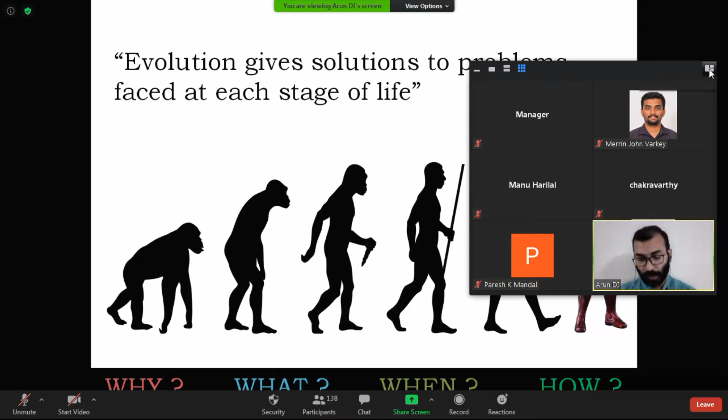Why to evolve? Because we wanted food, more food. What to evolve? We had to evolve based on the availability of tools and weaponry to hunt. When to evolve? When you are hungry, you are looking for food. How to evolve? It is the development of newer technologies. How do the newer technologies evolve? By means of newer materials.

So we have a problem. We identified a problem, and for attaining the solution, we have to go through a series of steps - with the support of evolution as well as intelligence, we are arriving at a solution. The ideas, thoughts, material, realization, and system are the step-by-step systematic approach towards a solution. Materials are highlighted in red because it is one of the major centers of attraction in this kind of approach.

We learn about materials. Hope you are familiar with the term space elevator. It's actually a concept of a transportation system planned to take men and material to space without a rocket or a launch vehicle. This concept works very similar to what I'll show you here.

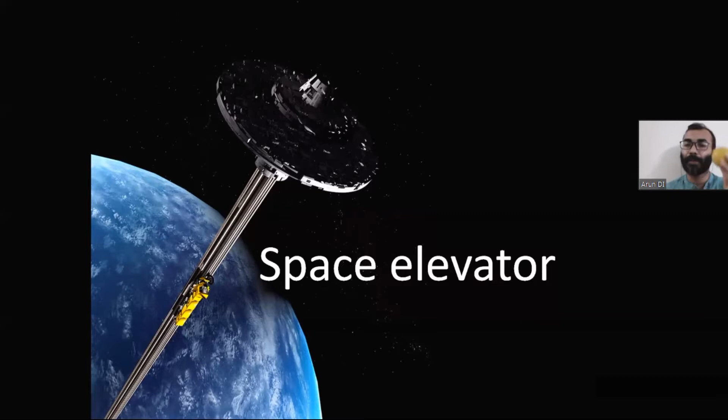This is a smiley ball, which we can use to represent Earth, and this is a counterweight which is attached to a thread. Now when we attach this to the surface of the Earth, it will rotate along with the Earth. This is how a space elevator is conceptualized - a counterweight will be rotating along with Earth and will be attached with a thread, and this thread should be entirely made of very strong material which can have transportation from the surface of the Earth to the counterweight. This is how a space elevator works.

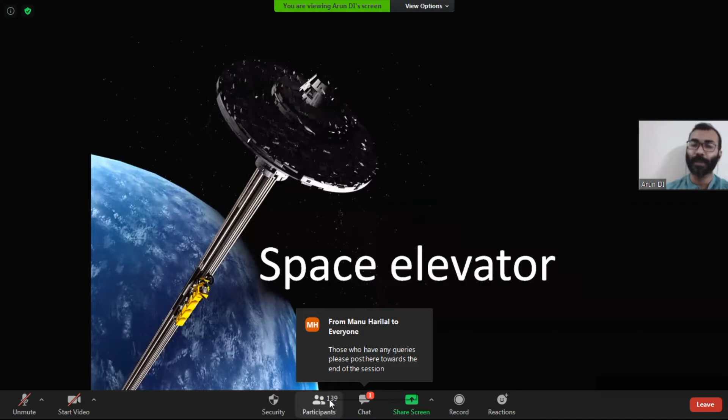This concept was proposed by Konstantin Tsiolkovsky in the early 20th century, but we were stuck in a place where we didn't have material to fabricate this kind of concept. So for that, many proposals have come, and out of that, we finally discovered that carbon nanotube, a carbon material, has very high strength - around 100 to 200 GPa strength, gigapascal strength - which can take the load of moving men and material from space in the space elevator. Elevator means lift only.

A current world order demands the development of science and technology, science and engineering, and opportunities using advanced materials as building blocks. You can see the background is a space platform, a scientific platform, which is planned in the orbit of our moon by NASA to study materials in outer space.

Which will lead us to many of the solutions and answers. Material science is an art, and a material scientist is an artist. It is basically the design and discovery of newer materials, one of the oldest forms of engineering and applied science, and it is analytical thinking from chemistry, physics, engineering to understand the phenomenological observations, a discipline hybridizing metallurgy, ceramics, solid state physics, and chemistry.

Many of the most severe problems in the scientific world are ending up in the question of having a better material. And any breakthrough in material science is likely to affect the future of technology significantly. This reminds me of a concept called the butterfly effect, where the flapping of the wing of a butterfly can cause a tornado somewhere else. So it is similar to our corona.

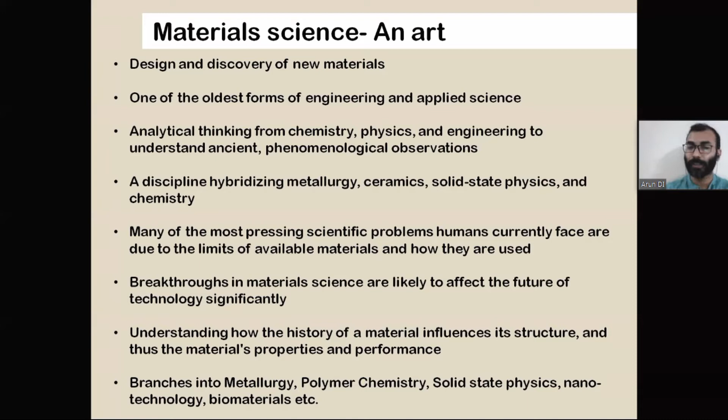Understanding the history of the material, its structure, its properties, and its performance comes under material science, and it branches into metallurgy, polymer chemistry, solid state physics, nanotechnology, biomaterials, etc.

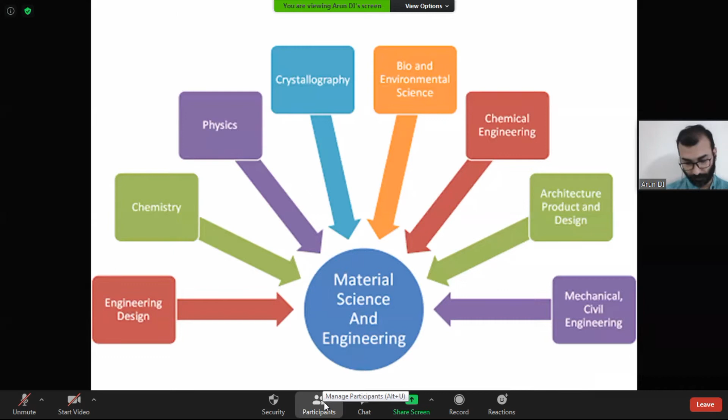So far, you have heard Dr. Arun, and this whole webinar series is about material science and engineering. So before getting into the actual theme of this particular webinar, you need to understand what material science is, which is going to focus only on metals and alloys.

So when you study the branch of metallurgy and material science, you would cover and understand the behavior of a variety of materials, including metals and alloys. So this is absolutely an interdisciplinary branch of engineering, which encompasses different other disciplines.

Starting from, if you need to understand the science behind those materials, you need to know the physics and chemistry of it. For example, steel: if I say steel is an alloy of iron and carbon, you need to know how much carbon should be added to iron so that it becomes steel, so that it has the requisite properties. So there comes your chemistry, and your physics is something which dictates the mechanical properties of the material.

So, suppose some load is exerted on the material, you need to understand how it is going to behave, whether it will have higher strength or lesser strength, or whether it will have very high hardness or very low hardness. So for all this understanding, you need to get into the actual science of these materials.

So this particular branch of engineering gives you complete insight into how material responds to external factors, and also helps you judiciously select the right material for certain applications. And in metallurgy engineering, you also study how metals are extracted from ores.

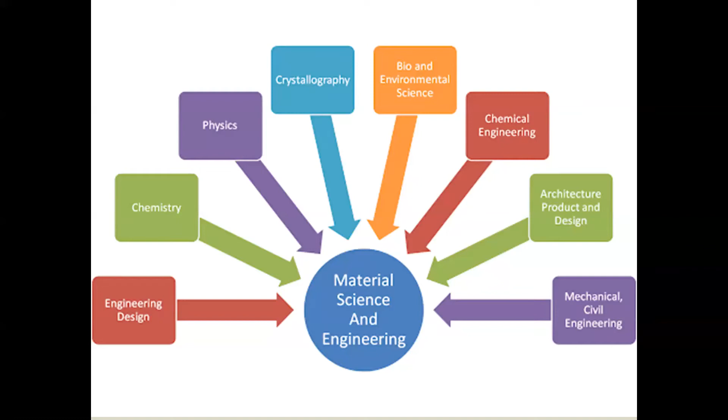Next slide. As mentioned earlier, materials are named, and the ages are named after the materials.

So the Paleolithic era can be traced to the Stone Age, and it has been termed as such. Next we had the Bronze Age, then subsequently the Iron Age, then the Steel Age, and then the Silicon Age. So when you look at history, it is all named based on materials, and this itself gives you an idea of how important materials have been for the revolutions that have happened so far.

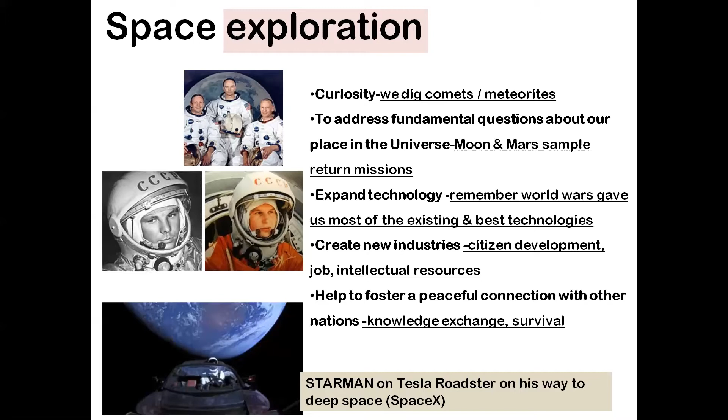Okay, so the materials which are used in space. Arun was mentioning about the space elevator, and every time we launch something to space, a satellite, it is going to be there at very high altitude, say at 36,000 kilometers altitude from the Earth's surface, or at an altitude of around 200 to 800 kilometers. So space is considered to be very harsh for any material to survive. It is not very benign, or comfortable, or convenient as it would be staying on the Earth's surface.

Suppose when you keep any steel outside for say 1 or 2 days on the Earth's surface, you see that immediately it is going to rust, particularly steel material used for construction. So in 2 or 3 days, you see that the steel turns slightly light brown in color, which means it has gotten rusted.

And similarly, when you're going to use materials in space, the corrosion, we call this rusting, is going to be more pronounced in space. And if you want to use any material which should not rust, you need to have knowledge of the variety of materials, then only you will be able to select the right material for space applications.

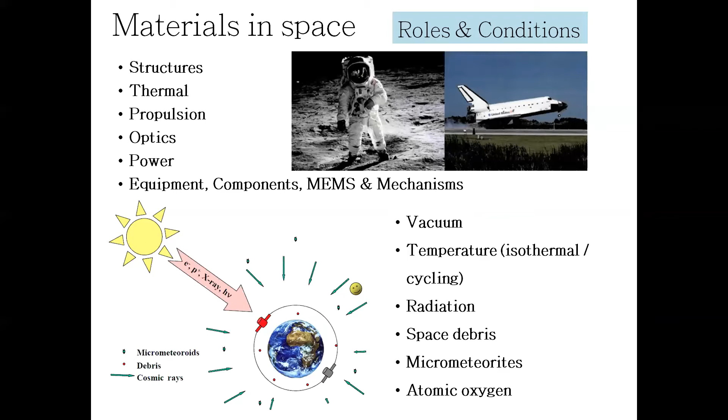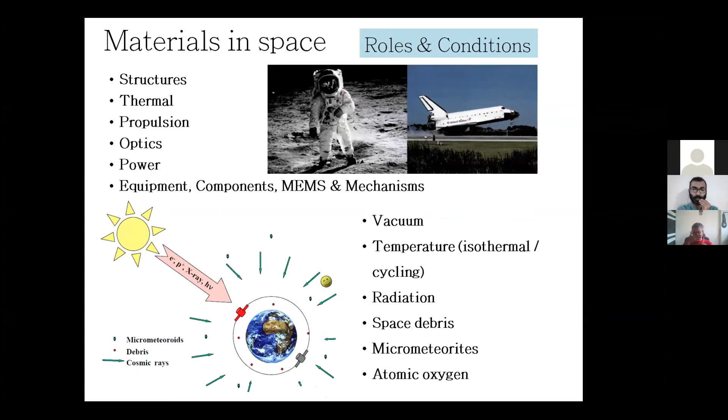Adding to what Dr. Chakravarti told, we have people staying in the International Space Station. So radiation protection is also a significant aspect while deciding the material which can survive high radiations, gamma radiations, X-rays and UV radiations from the sun and other stars and deep space should be resisted by the material so that our astronauts or scientists in space are safe against all these radiations. Thank you, Dr. Chakravarti.

Now, let us go to, we have seen material, what is material, and what properties are required. So what are the different types of material we will just look into? As Dr. Chakravarti mentioned, ceramics, metals, polymers and composites are different categories, a broad category of materials when we look into material science aspects.

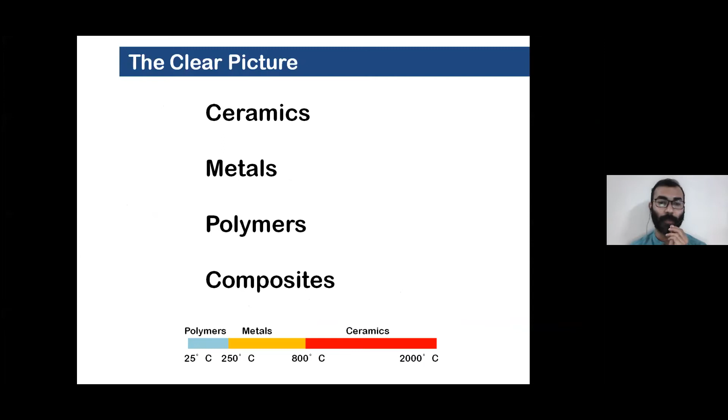Ceramics are for higher temperature, up to around 2000 to 2500 degrees Celsius, and metals will resist maximum up to 800 degrees Celsius. Polymers can resist up to 250 to 300 degrees Celsius. And composite materials are a combination of either of these materials, which can have properties of any of these materials, superior properties than any of these materials. We will see in detail all the materials in the subsequent slides.

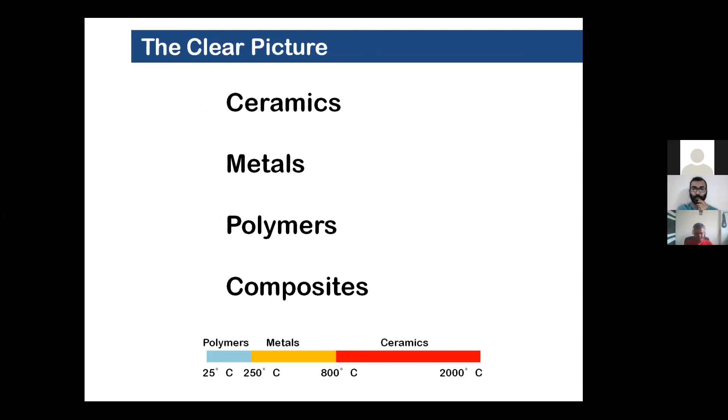Out of materials used in space applications, mostly we go for alloys because they have superior properties than their metal counterparts. So aluminum alloys, titanium alloys, inconel alloys for oxygen storage. Then we go for composite materials - glass epoxy composite, carbon epoxy and aramid epoxy composite, which we will see in the subsequent slides.

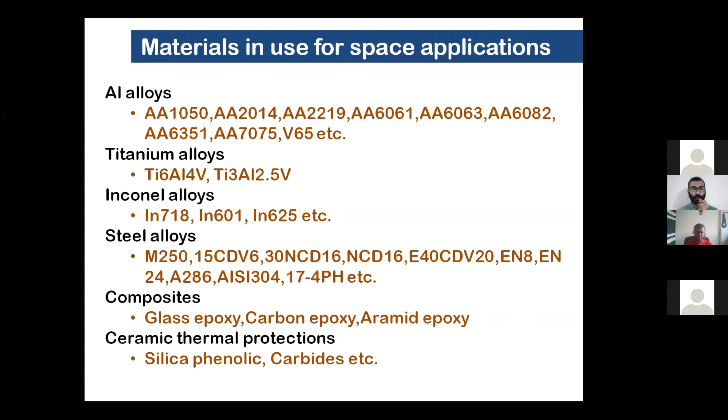And ceramic thermal protection systems. As Dr. Chakravarti was mentioning, whenever a re-entry module or space shuttle enters the Earth's atmosphere, due to the aerothermal effect or high temperature caused by the friction of the air, the material needs to survive that temperature. For that, we use silica phenolic or carbide, silica phenolic and carbide combination tiles, which can take up that much temperature.

Now the material paradigm - Dr. Chakravarti can tell this. Yeah, that's what I've been telling you regarding the science behind every material. Say, for example, if you want to use any material for any specific application, you need to manufacture it first.

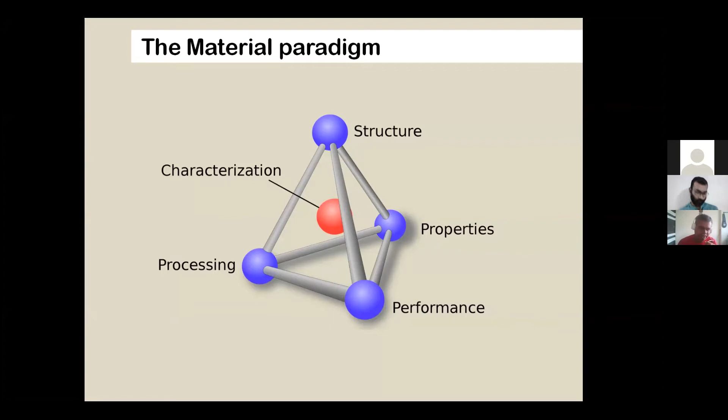Say, for example, you have a raw material - you take a utensil which is used for domestic purpose. So how do you think that utensil is made? What should be the raw material and all those, right? If you want to make a utensil from a sheet metal, you need to understand the flowability of that particular material, whether it is going to flow or not. You all might have seen in the roadside shops where a blacksmith is going to...

Sharpen his axe by repeatedly hammering it at higher temperature. If you want to sharpen an axe, what a blacksmith will do is start heating it to a higher temperature, say at the order of 700 to 800 degrees centigrade, and then start hammering it so that he can easily sharpen it, right? Why should he heat it to very high temperature? Why is he not hammering it at room temperature itself? So this is for steel.

So steels are heated to slightly higher temperature and then they are hammered so that it causes the material to flow or deform, so that it takes up the desired shape. So there the objective or intention is to sharpen the material. The sharpening is made by heating the material and then repeatedly hammering it. So this is what is called processing.

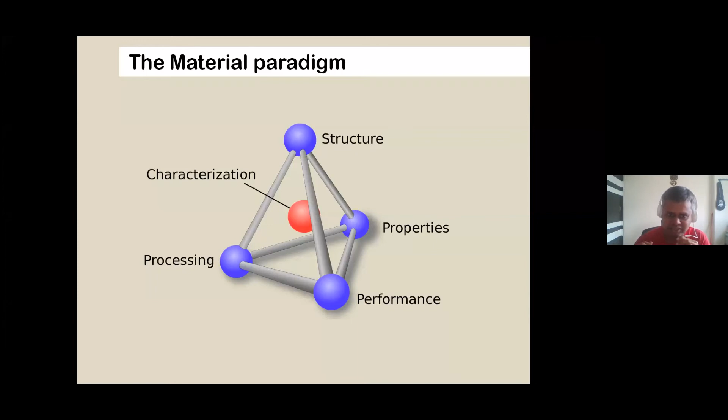Now we'll see independently all the materials which we have categorized earlier. First one is ceramics, which are inorganic compounds of metal or metalloid and non-metal with ionic or covalent bonds.

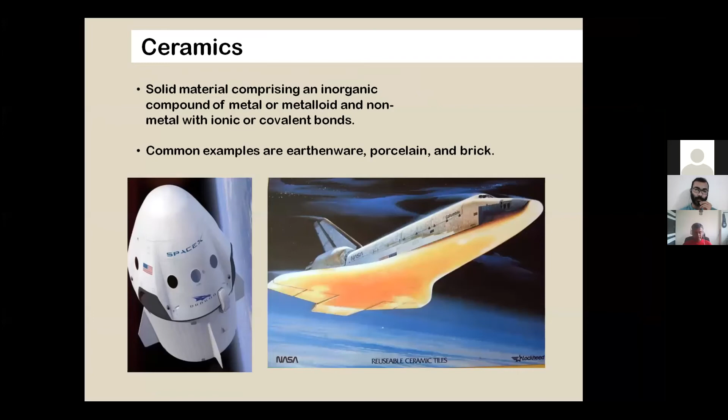As Dr. Chakravarti was mentioning, steel will not take this much temperature; it gets melted off by around 800 degrees Celsius, and beyond that the temperature affects the structure. So to prevent that, ceramics are used, which can take up to 2000 to 2500 degrees Celsius. The portions where higher temperature is expected are covered with tiles—ceramic, silicon carbide, or silica phenolic tiles—used for surviving that high temperature.

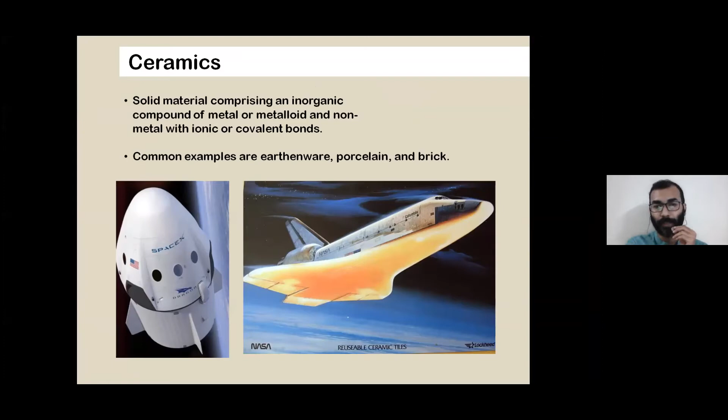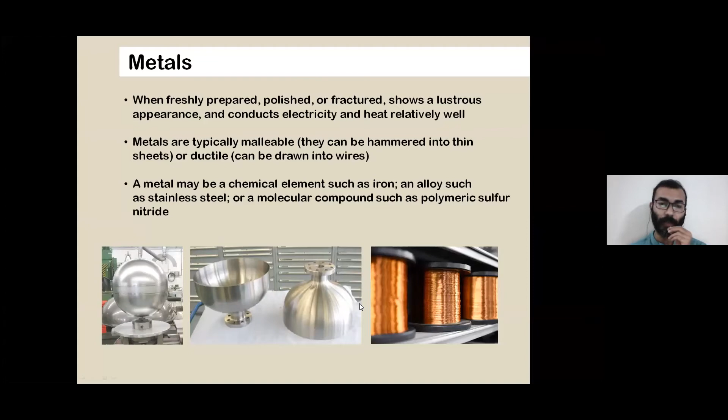Polymers are substances which are very large molecules, called macromolecules, formed by combination of monomeric materials, which you have learned in your chemistry textbooks, through different types of polymerization, fabrication, or synthesis processes. Polymers, generally known as plastics, are very good at forming complex shapes as well as lightweight structures in place of metals and other ceramics, but they survive much less temperature when compared with ceramics and metals.

Now, composites—materials created by a combination of two or more dissimilar materials that give a superior property than the combination materials individually—are called composite materials. They are heterogeneous in nature and need not have a chemical reaction between the constituent materials.

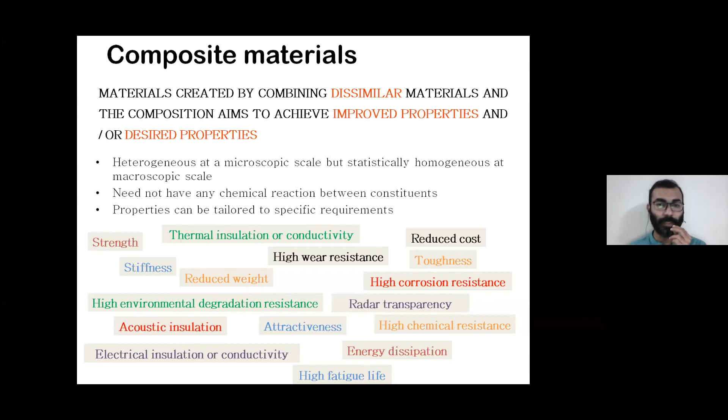Now, spacecraft or satellites have many composite parts. About 99% of the parts of a satellite are made of composite material, including the satellite basic structure, antenna structures, reflectors, camera structures, solar panel substrates, etc. Cameras are also fabricated by means of composite materials.

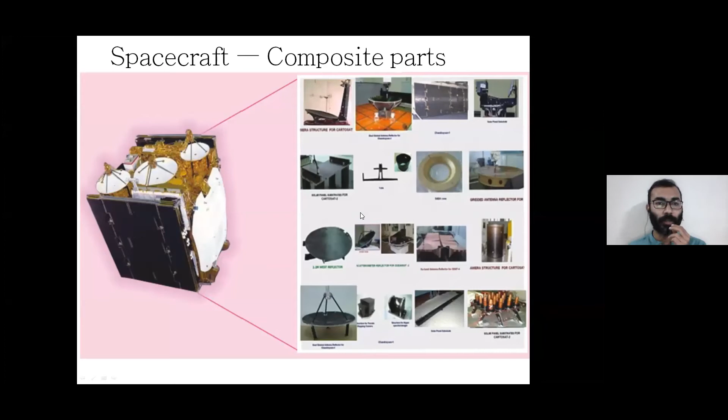We have the motor cases where our fuel, liquid and solid, is stored. Rocket fuel is generally termed propellant, so propellant storage is also done with composite parts.

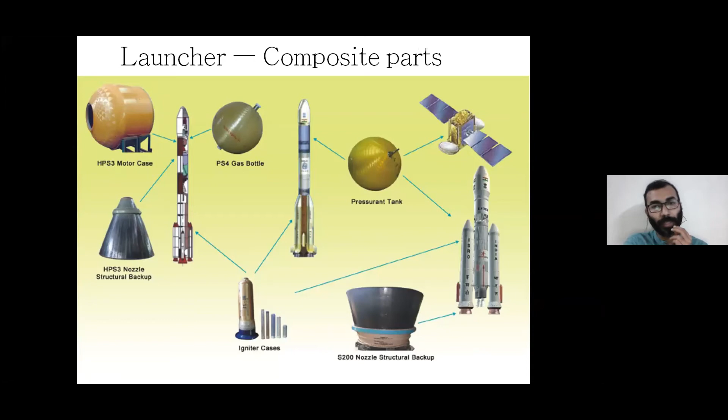We also have bigger plans of making a space station, a scientific platform around Earth similar to the International Space Station, by around 2030. We are planning to study the Sun with the Aditya mission, which requires high thermal resistant materials like mylar sheets with advanced sun screening technologies. Then the Venus mission, Shukrayaan, is coming up, which will survive the severe sulfuric acid conditions inside Venus's atmosphere. So material science has a huge prospect on the space side, or ISRO side.

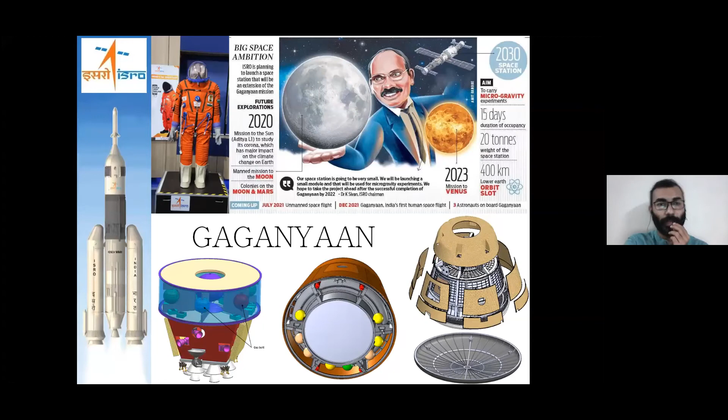We have seen materials, their properties, requirements, and applications. We'll now look at the fabrication aspect also. As Dr. Chakravarti told, there are different fabrication methods for metals, ceramics, polymers, and composites. But one common aspect is 3D printing, which includes FDM (fused deposition modeling), stereolithography, digital light processing, etc. This forms the three-dimensional shape without a mold, which is the advantage of 3D printing, giving an advantage in time as well.

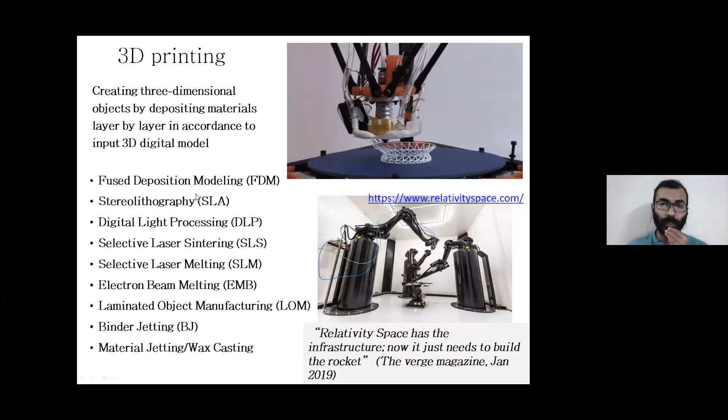Now, 3D printing is not a new thing, it has been in business for the past 10 years. We have had entire rockets 3D printed, CubeSats or satellites 3D printed, and satellite parts 3D printed.

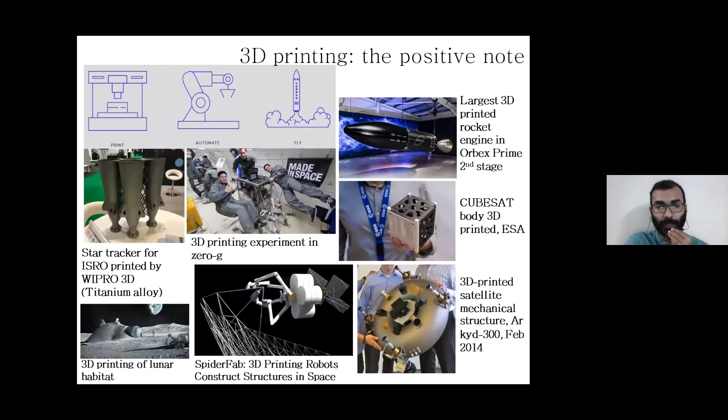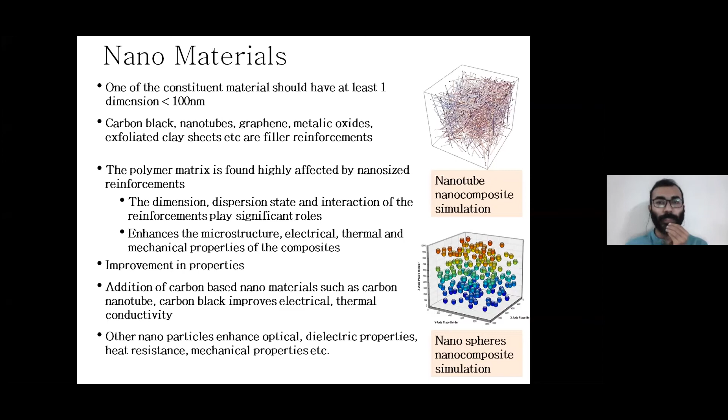As mentioned, in case of a space elevator, high strength is required. For that also we are using nanomaterials, and combination of these nanomaterials with polymeric resin or metallic matrix can give a composite material. Now, these are the areas of application, as our Reverend Father explained in his inaugural address.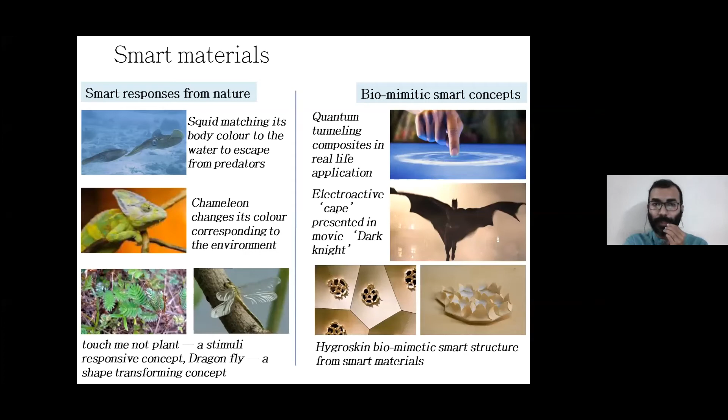Shape morphing materials, which respond to an external stimulus and change their shape, are called shape morphing materials. The first figure shows the wing of an aircraft - if you've sat in an emergency exit window seat, you might have noticed the flaps going down and coming up while the aircraft takes off and lands. This can be achieved using a morphing wing concept without much mechanism, because mechanisms can fail anytime. This is a property of material that we are making use of in this case.

Then there's the concept of deployment mechanisms for antennas. You can see the stored antenna which is deployed by passing electric current. You can see solar panel deployment concepts, mandrels and reflectors.

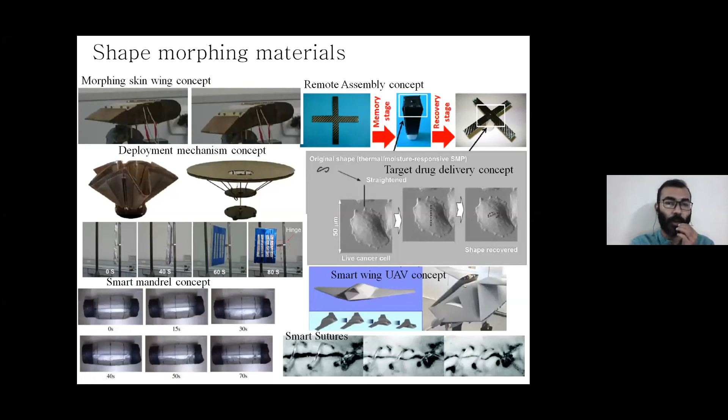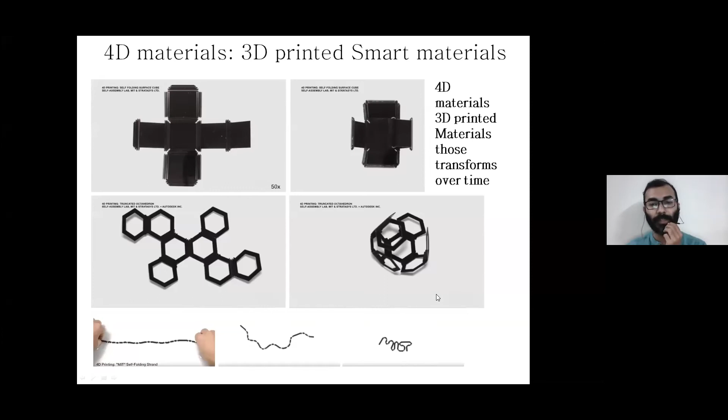Similar to what we have seen with IIST, MIT has also done an experiment. Massachusetts Institute of Technology has done an experiment with a hydrogel, where they put printed gel in hot water, which forms the letters MIT by action of shape memory.

Now, the future aspects or future prospects of the subject, as Dr. Chakravarti was mentioning, are in different branches of metallurgy, including extractive metallurgy, mechanical metallurgy, chemical, physical processes, foundry, and an enormous number of opportunities available with metals itself.

Then polymer chemistry, polymer industries, and composite industries, corrosion science, nanostructured materials, smart material industries, metallurgical failure analysis, archaeological metallurgy, etc. are the branches where once you complete the course of metallurgical and material science engineering, you can look for future prospects in these areas.

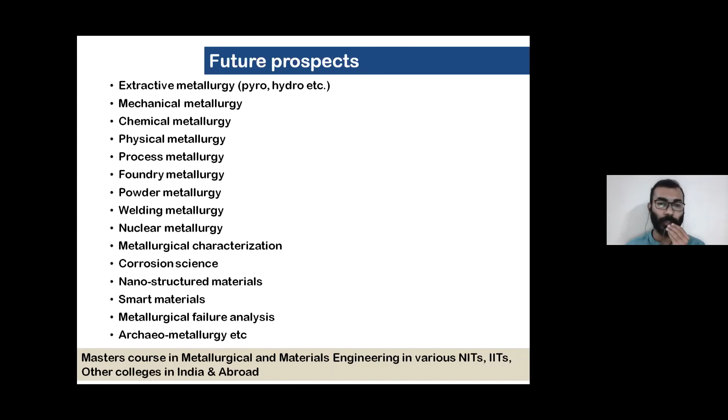And there are master's courses in many institutions across India and abroad, including this Amal Jyoti Engineering College. That's all from our side.

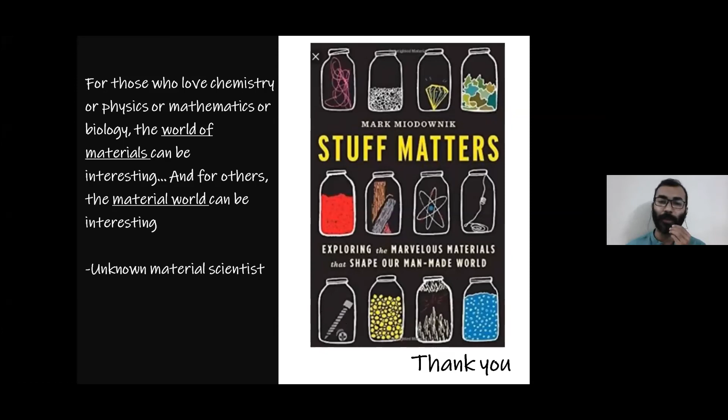Actually, I would suggest you read the book 'Stuff Matters' by Mark Miodownik. It is a wonderful book which will give an idea regarding materials, all kinds of materials, in the form of a story, which will help you develop interest in different aspects, even in the smallest part of our daily life. We are dealing with so many materials, so that will help you generate interest on all these aspects. Thank you.